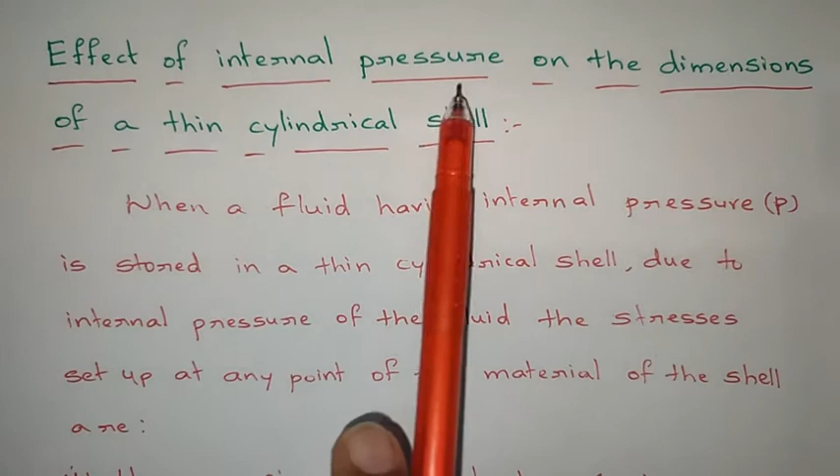Hi everyone. In this video I am going to discuss the effect of internal pressure on the dimensions of a thin cylindrical shell.

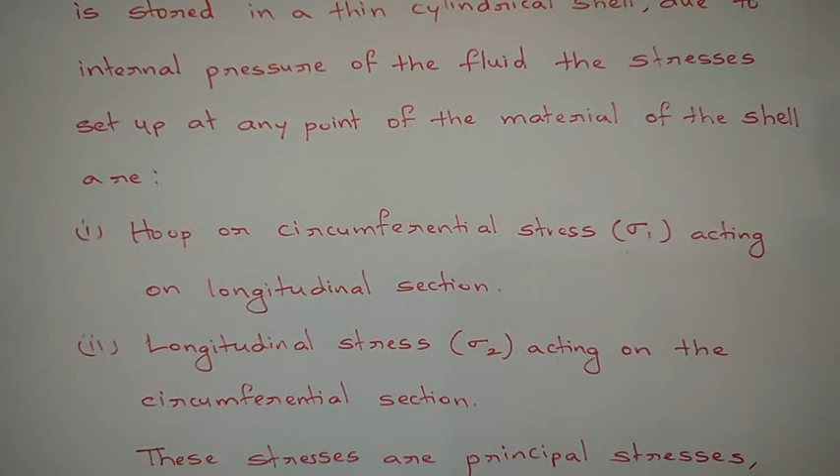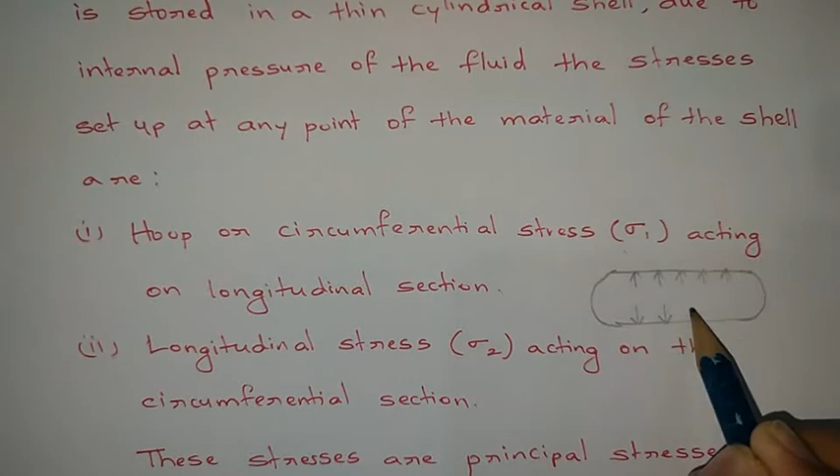If you take the cylindrical shell like this, the hoop stress will act in this direction, or circumferential stress will act in this direction.

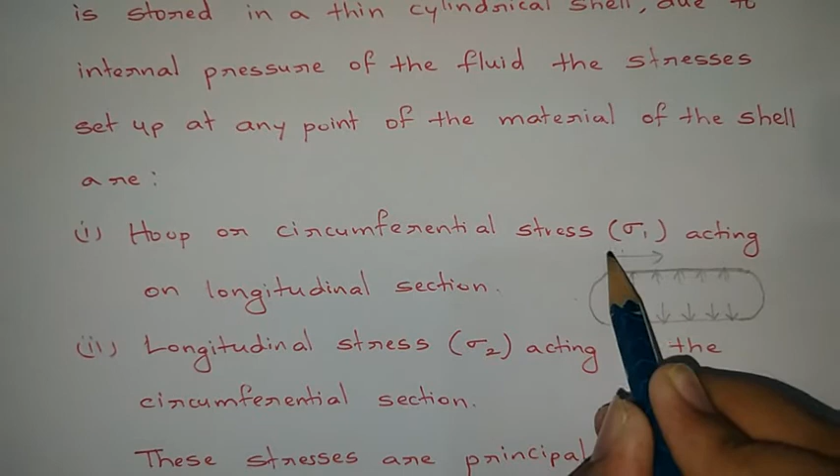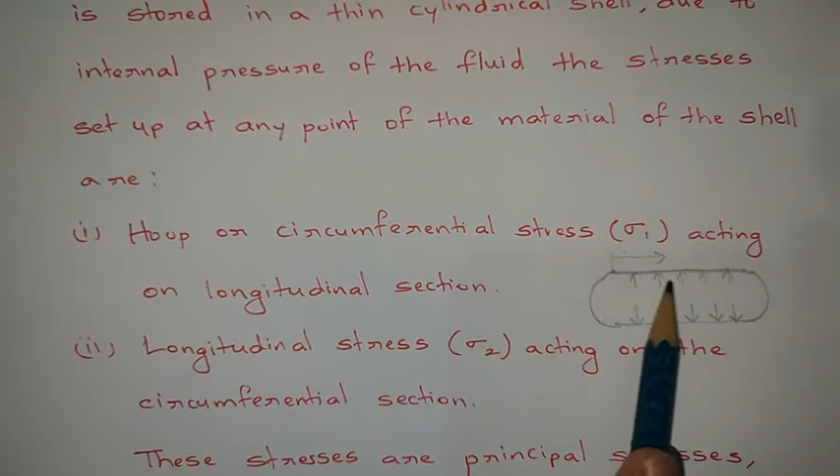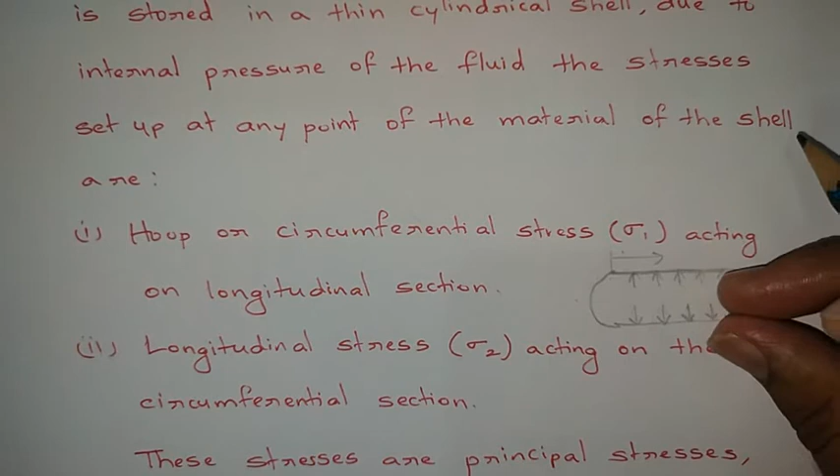This is tensile in nature. If the internal pressure is acting in this way, it will try to elongate the diameter, it will try to increase the diameter. So that nature is tensile.

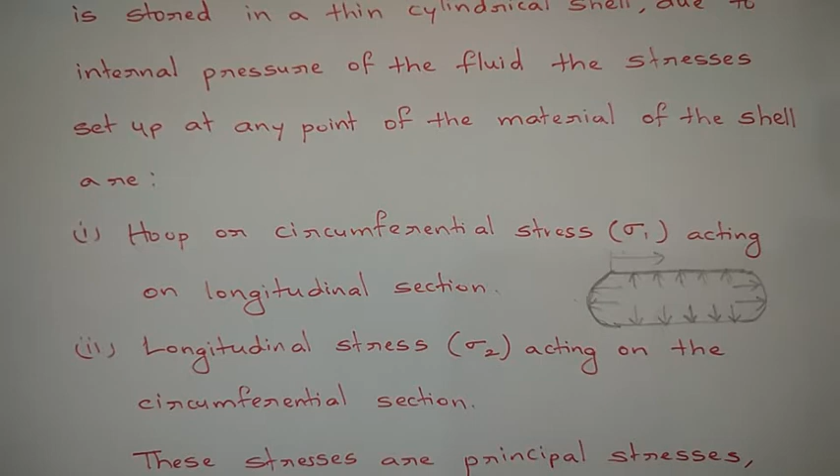Next, longitudinal stress sigma 2 acting on the circumferential section. This is the longitudinal stress, acting on the circumferential section, and it is also tensile in nature.

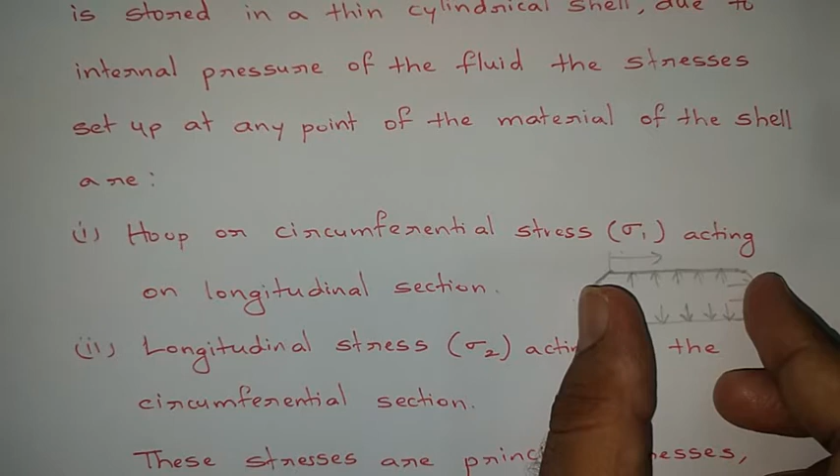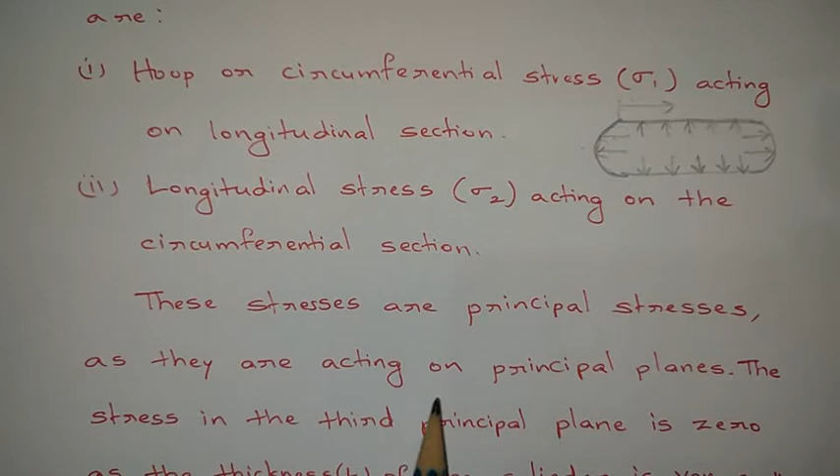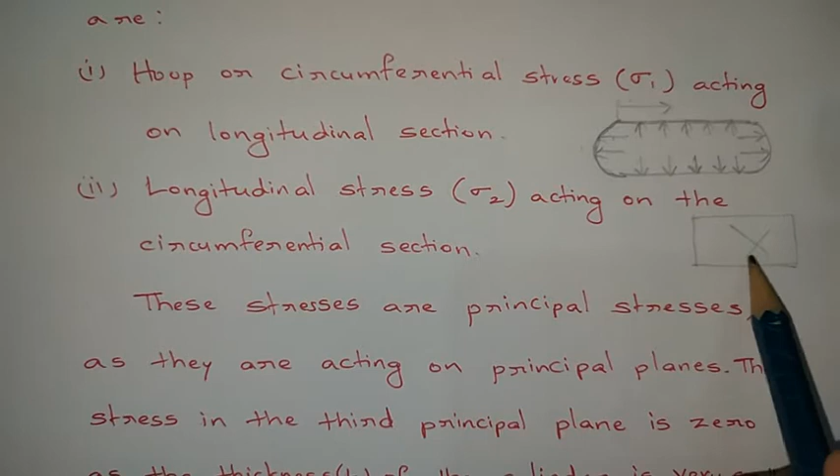These stresses are nothing but principal stresses as they are acting on the principal planes. If you take a plane, the maximum and minimum principal stresses are the stresses acting in the x direction and y direction. So those are known as principal stresses, acting on the principal planes.

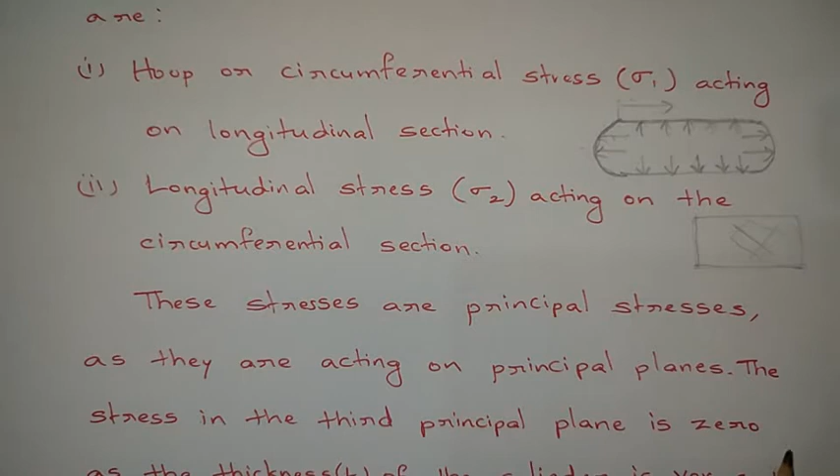The stress in the third principal plane is zero as the thickness of the cylinder is very small. The third dimension is thickness. Since this thickness value is small, considering a coordinate system, we have XY plane, YZ plane, and ZX plane - three planes in total.

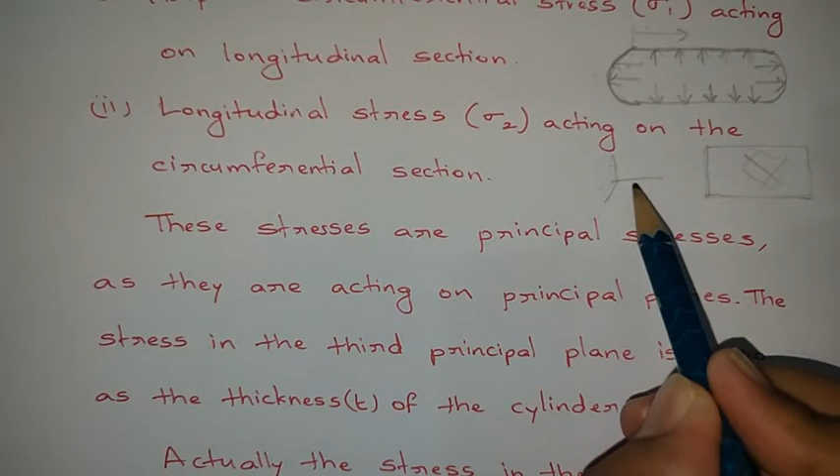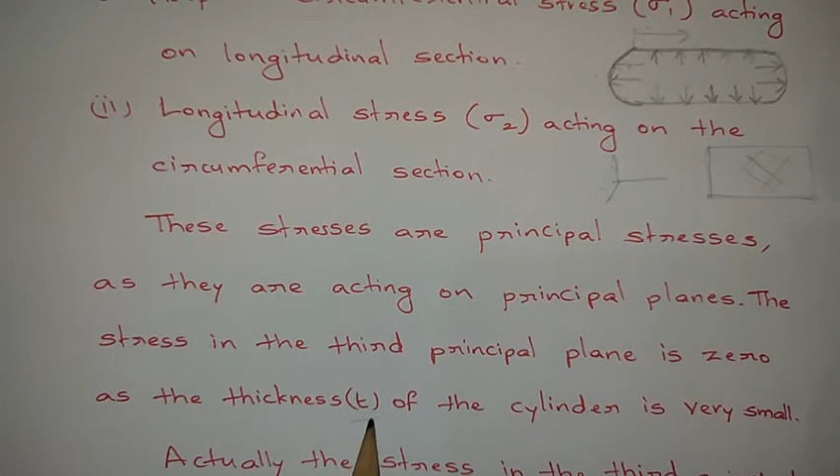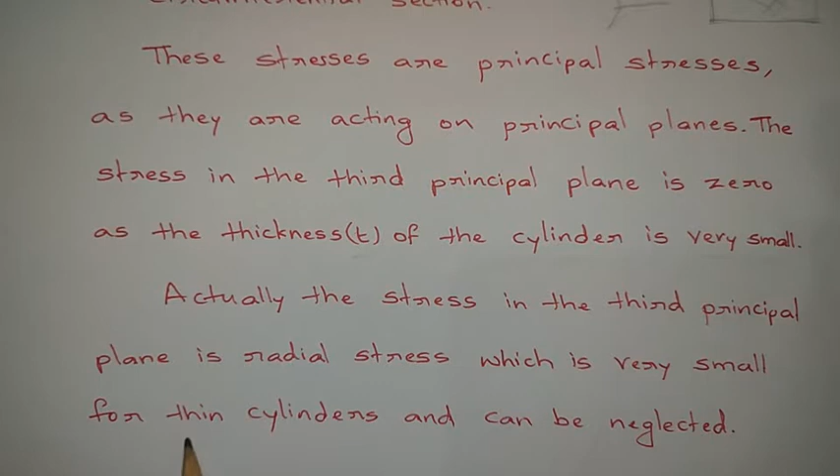Actually the stress in the third principal plane is radial stress, which is very small for thin cylinders and can be neglected, since the thickness value is very small.

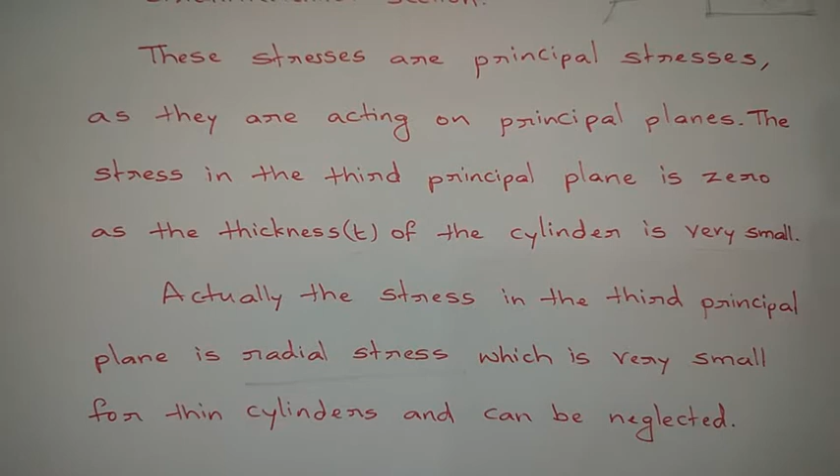Now we are going to calculate the change in dimensions of the cylindrical shell due to the circumferential and longitudinal stress only.

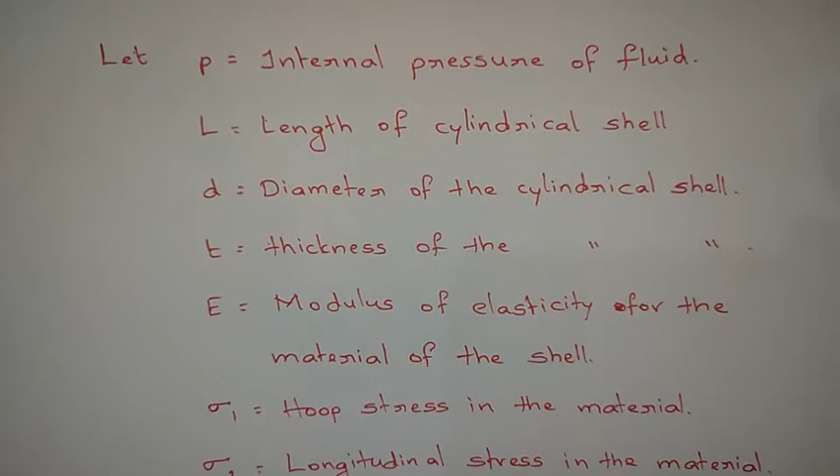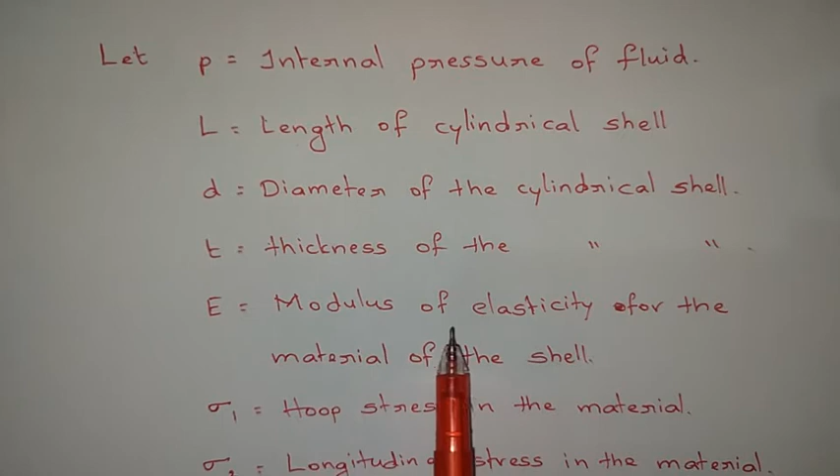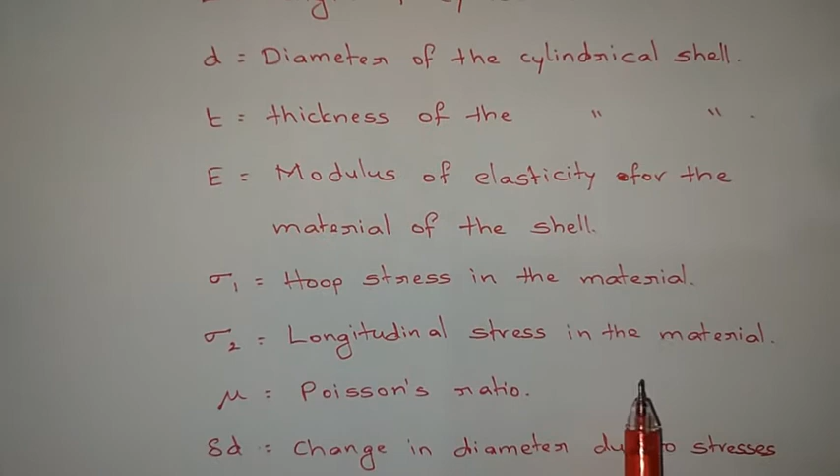Let P equals internal pressure of fluid, capital L equals length of the cylindrical shell, small d is diameter of the cylindrical shell, T is thickness of the cylindrical shell, E equals modulus of elasticity for the material of the shell, sigma 1 is hoop stress in the material, sigma 2 is longitudinal stress in the material, mu equals Poisson's ratio, and delta D is the change in diameter due to the stresses set up in the material.

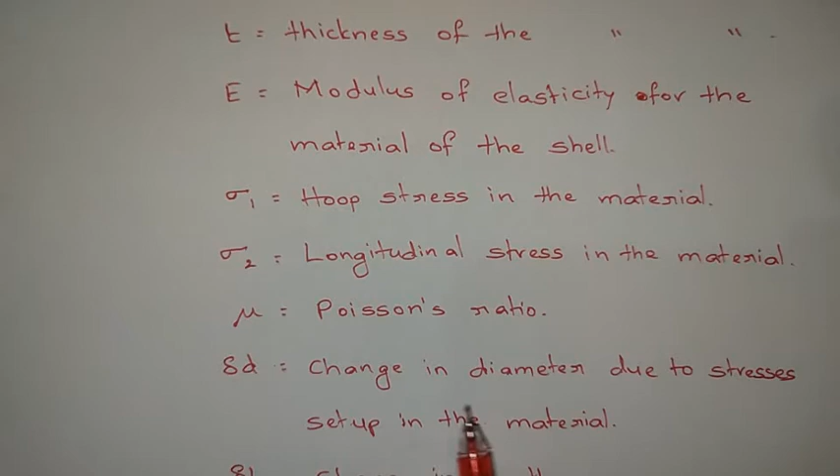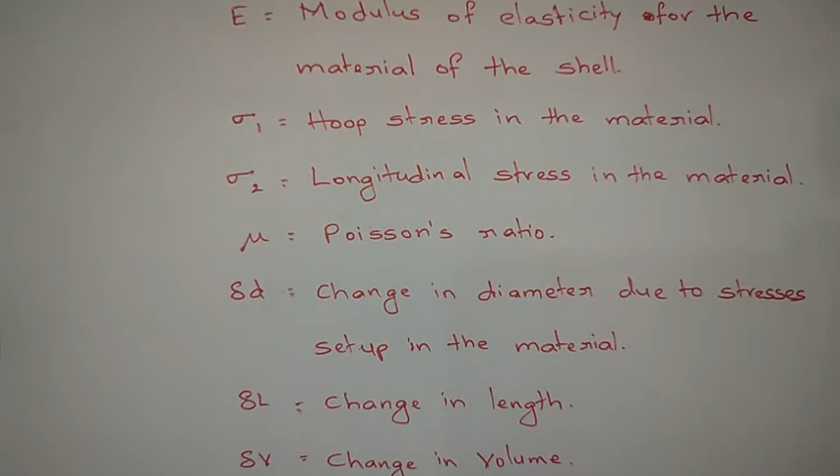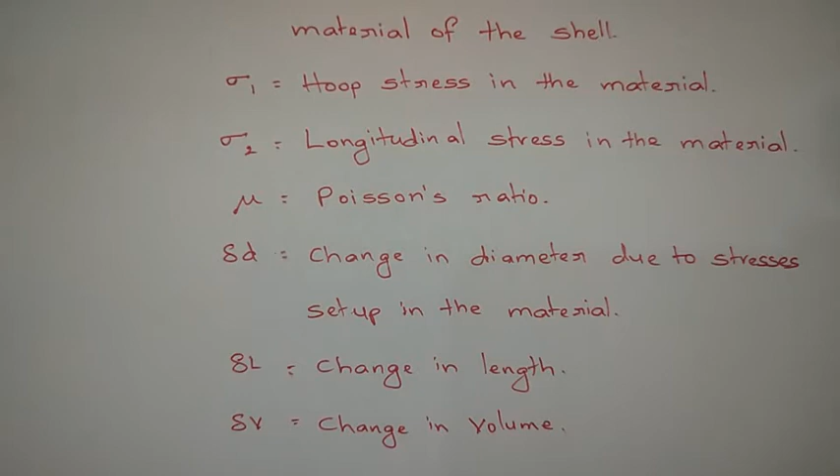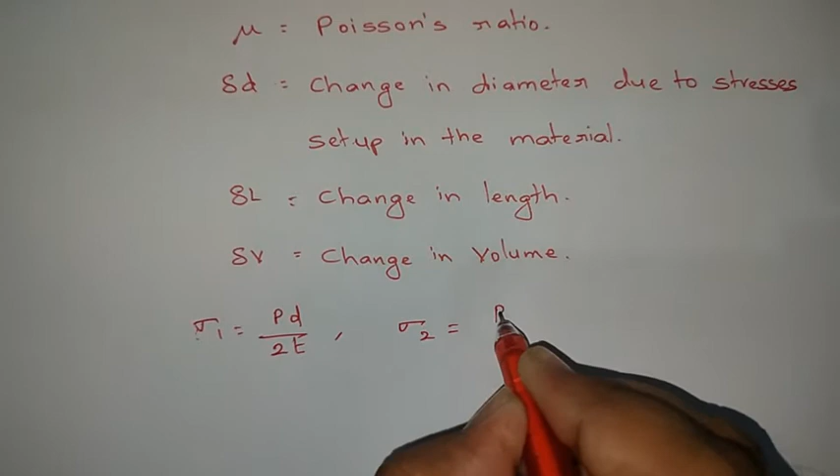Now let us write the values of sigma 1 and sigma 2. What is the formula for sigma 1? Sigma 1 equals PD by 2T. And what is the formula for sigma 2? Sigma 2 equals PD by 4T.

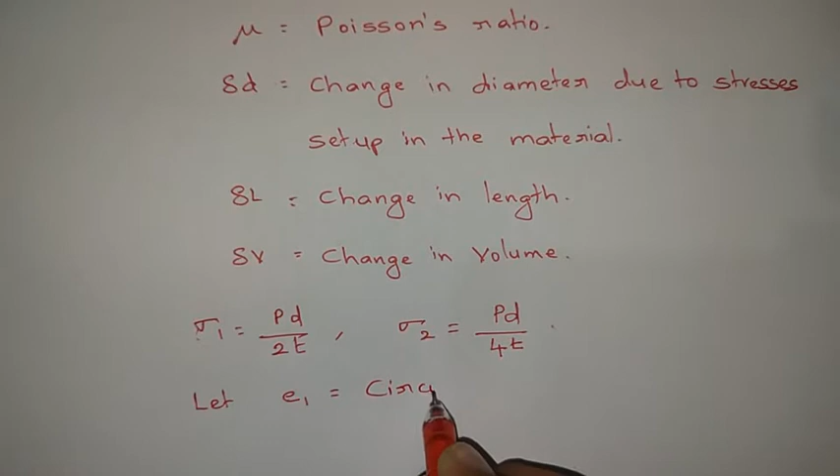And let us say small e1 is the circumferential strain, and small e2 is the longitudinal strain. So now I want to find out these values.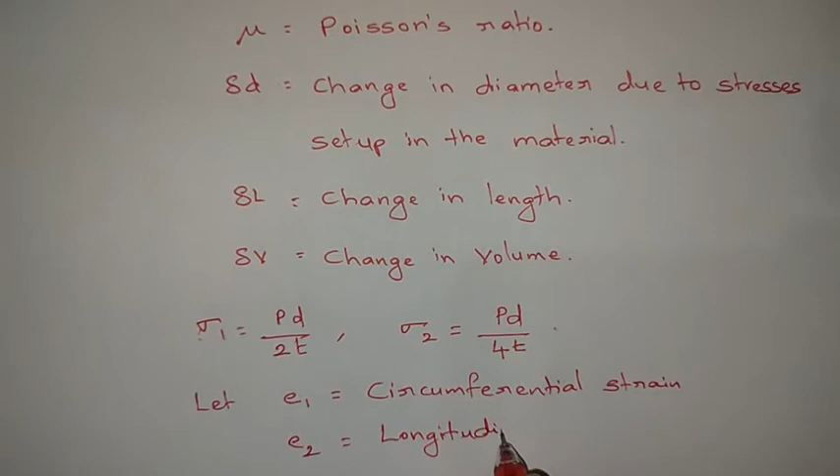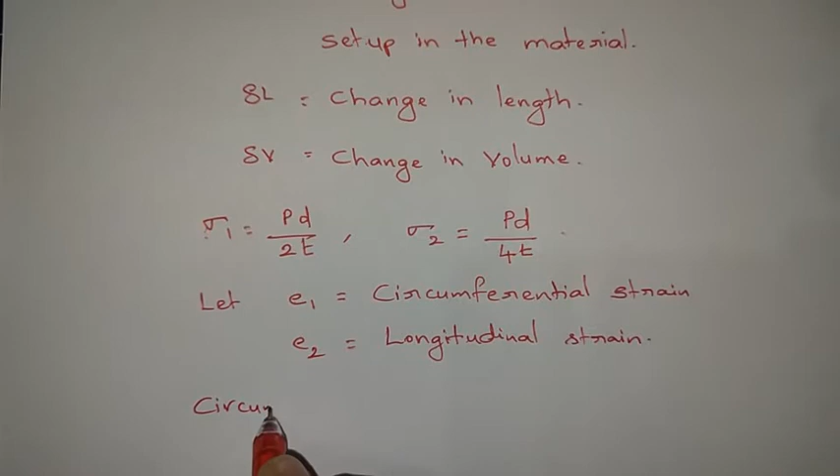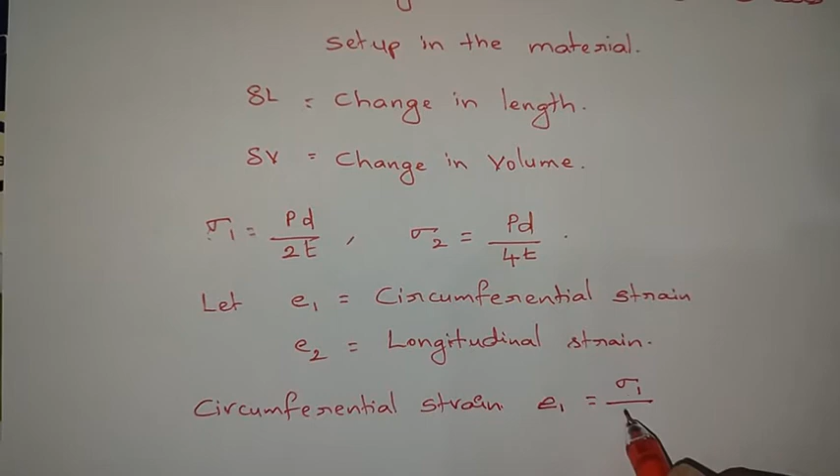Okay, so what is circumferential strain? Circumferential strain E1 is equals to strain, which means stress by Young's modulus in that direction. So this is in the circumferential direction, but there is a stress in the longitudinal direction also, so we have to subtract minus Poisson's ratio mu into sigma 2 by E.

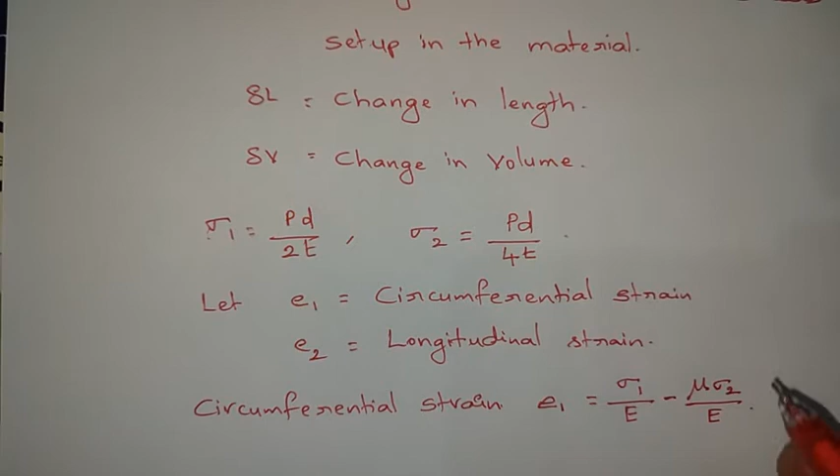So the Poisson's ratio you can take it as mu or nu.

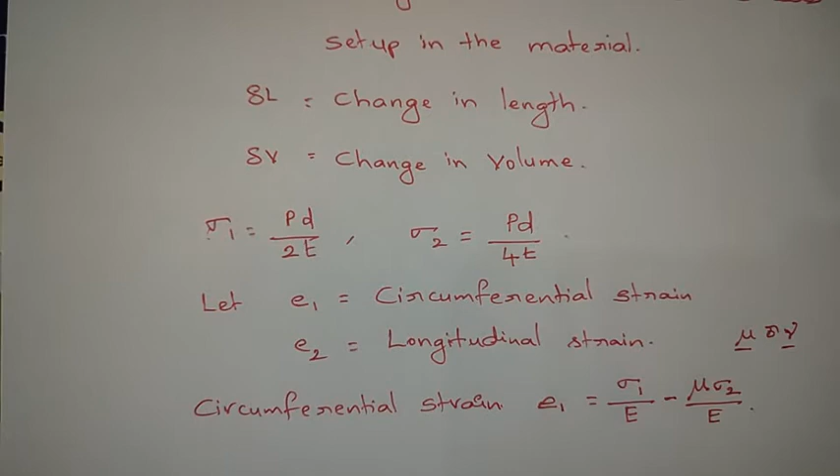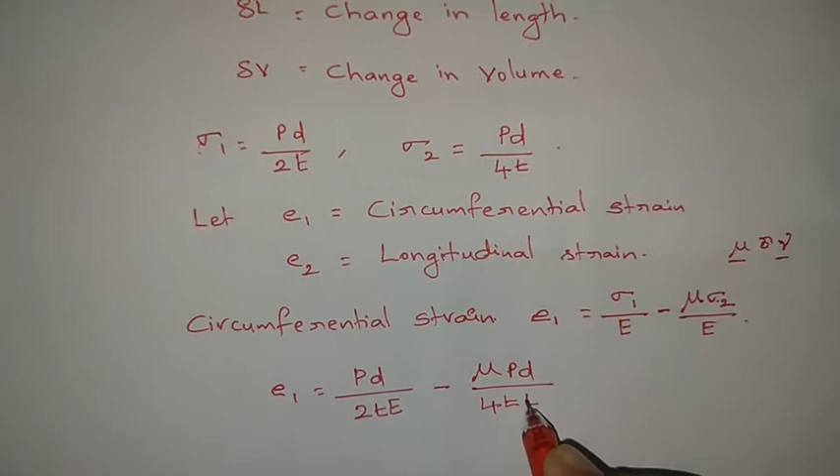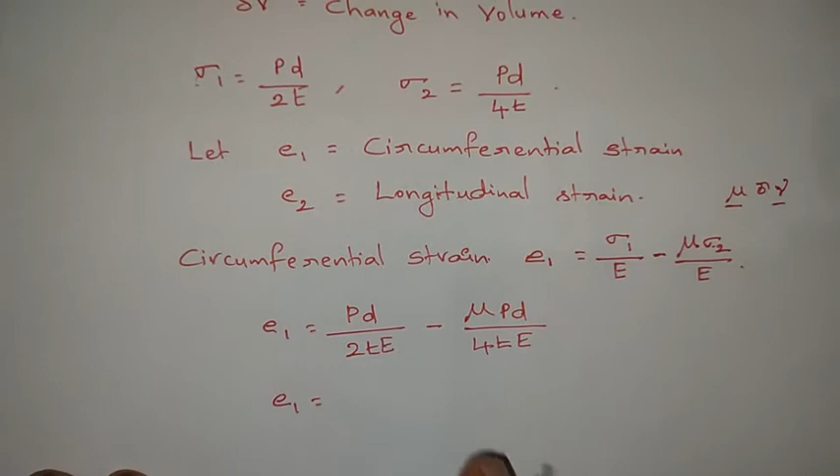Now substitute the values of sigma 1 and sigma 2. So E1 is equals to sigma 1 is PD by 2TE, minus mu into sigma 2 value which is PD by 4TE. So now what is the common term? PD by 2TE is the common term. Then 1 minus mu by 2 is the value of E1.

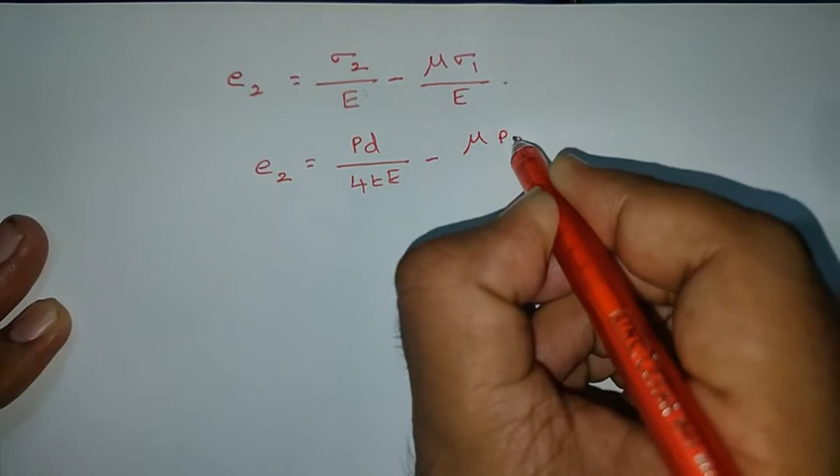Next, let us calculate the value of E2, which is longitudinal strain. So sigma 2 by E minus mu into sigma 1 by E. Now substitute the values of sigma 2 and sigma 1. So E2 is equals to PD by 4TE minus mu into PD by 2TE. So what can we take as common? PD by 2TE. Take this as common, then you get 1 by 2 minus mu. So that is the E2 value.

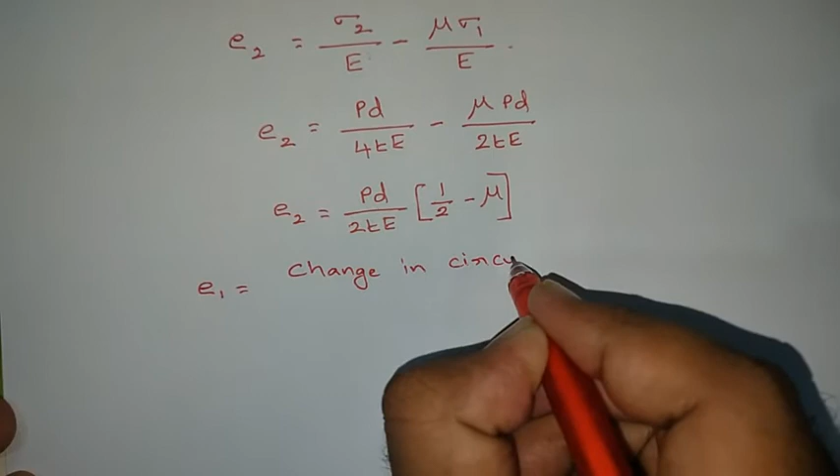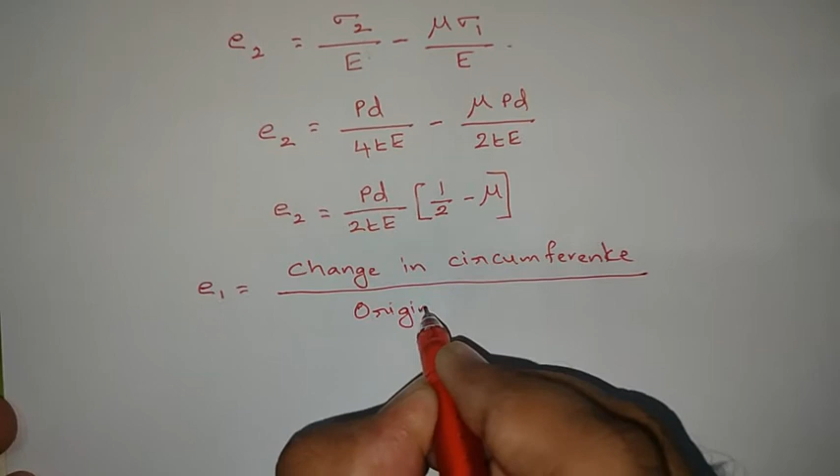So what is E1? E1 equals to circumferential strain. Generally what is the formula for strain? Change in dimension by original dimension. So here I am taking circumferential strain. So what can I write? Change in circumference by original circumference.

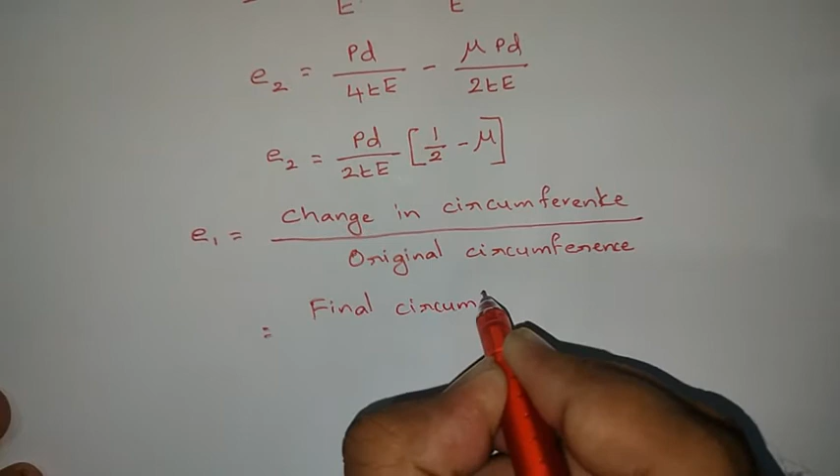So what is change in circumference? Final circumference minus original circumference, by original circumference.

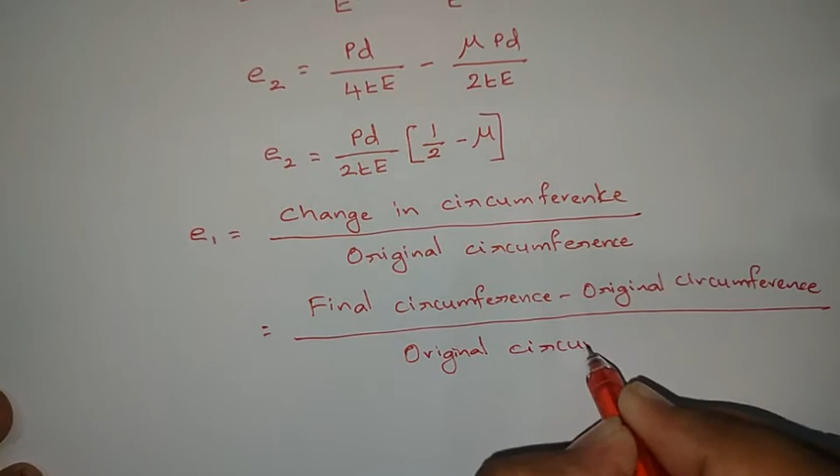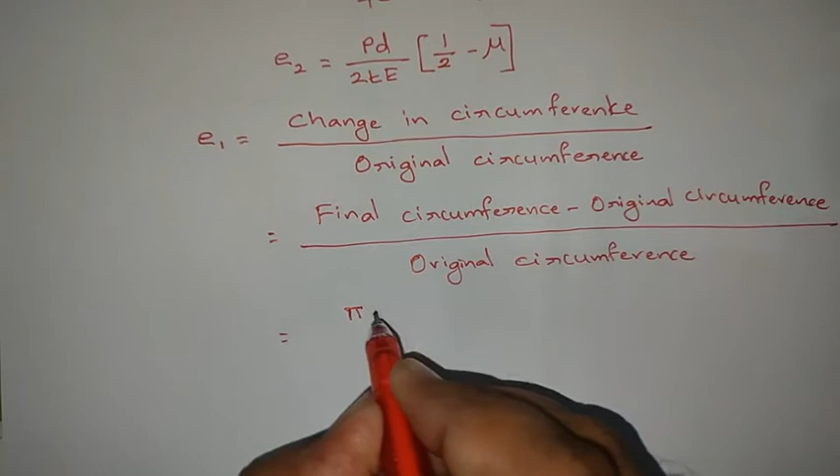So that equals to, what is the final circumference? Circumference formula is pi into d. So what is the change in diameter? Add the change, original is d, so the diameter increases by delta d. So final circumference minus original circumference is pi into d plus pi into delta d, minus pi d, all by pi d. So pi d will be cancelled, and pi will be cancelled. So what is the remaining? E1 equals to delta d by small d.

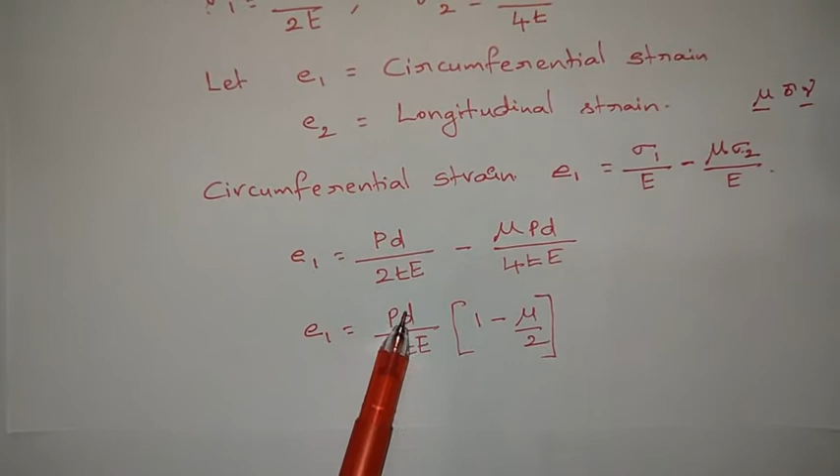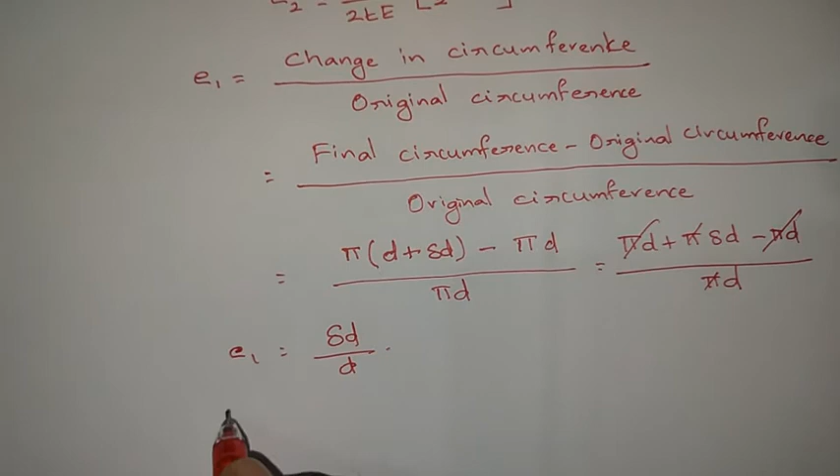But what already we got as E1? We got E1 as PD by 2TE into 1 minus mu by 2. So take this as one E1, and the other E1 is delta d by d. So equate these two. Then delta d by d is equals to PD by 2TE into 1 minus mu by 2.

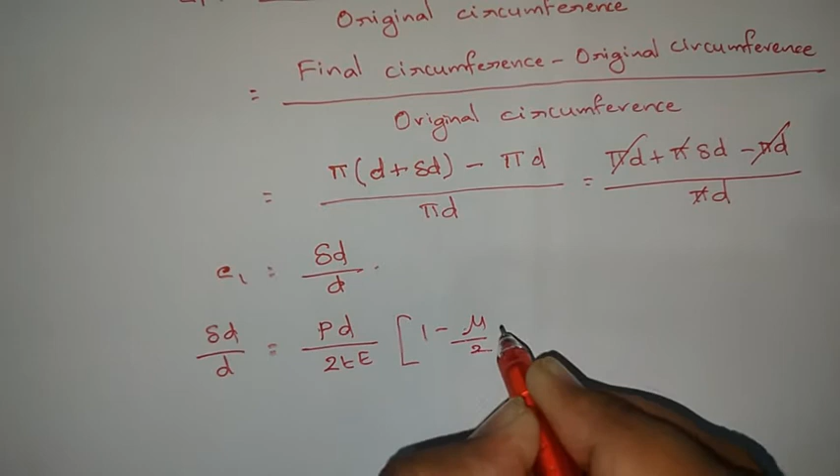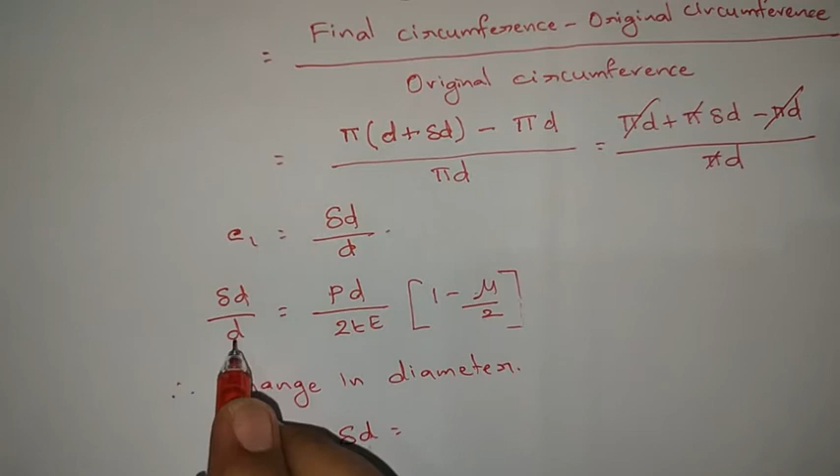So what is the change in diameter? Therefore, change in diameter delta d is equals to, so this d will come to the numerator, then PD square by 2TE into 1 minus mu by 2. So this is the change in diameter due to the internal pressure P.

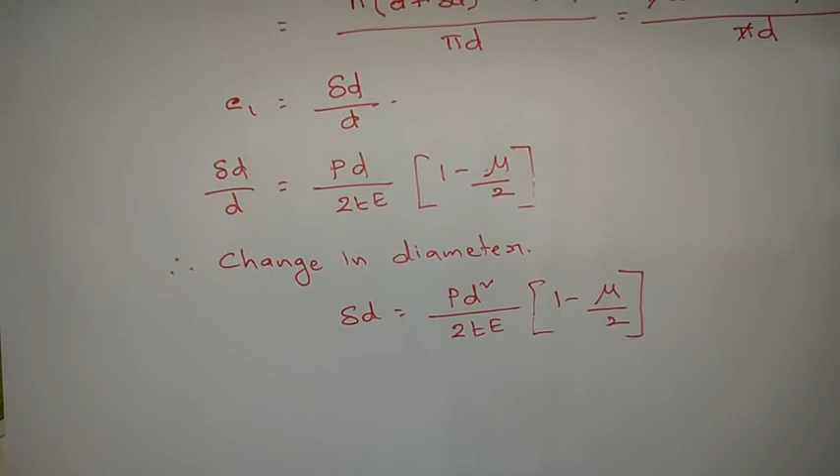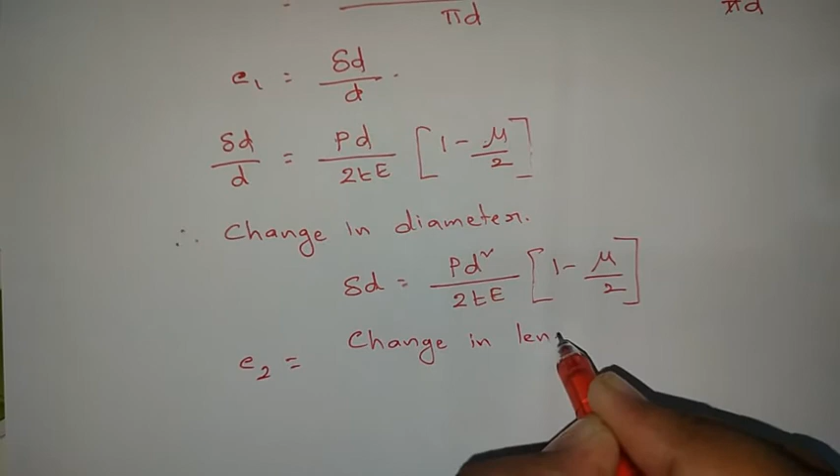Next, let us calculate the change in length. So what do we know? E2 is equals to longitudinal strain. Longitudinal means length direction. So E2 is equals to change in length by original length. So what is change in length? That is delta L, the change in length, by original length L. But already we got E2 as PD by 2TE into 1 by 2 minus mu.

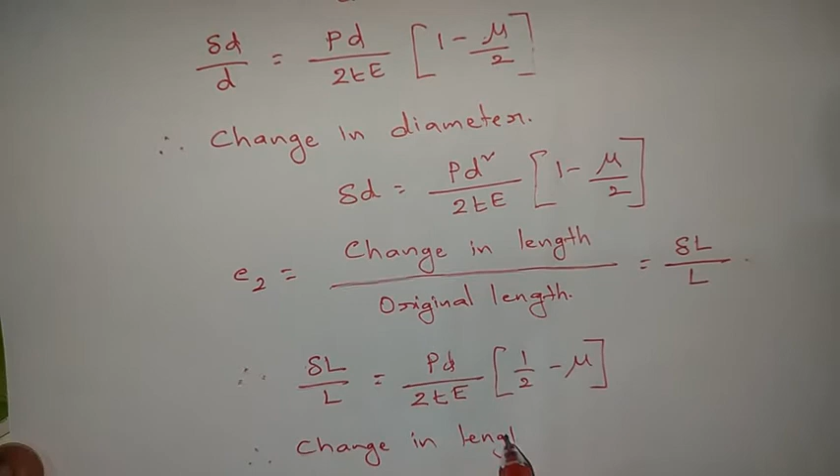So equate this one to delta L by L. Therefore delta L by L is equals to PD by 2TE into 1 by 2 minus mu. Therefore change in length delta L is equals to, so this L will come to the numerator, so that is PDL by 2TE into 1 by 2 minus mu. So this is the change in length.

So we calculated change in diameter and we calculated change in length also. Now let us calculate the change in volume. For calculating the change in volume, I am taking volumetric strain. So what is volumetric strain? Volumetric strain is equals to change in volume by original volume, that is delta V by original volume V. Now let us calculate both terms. First calculate change in volume. Change in volume is equals to final volume minus original volume.

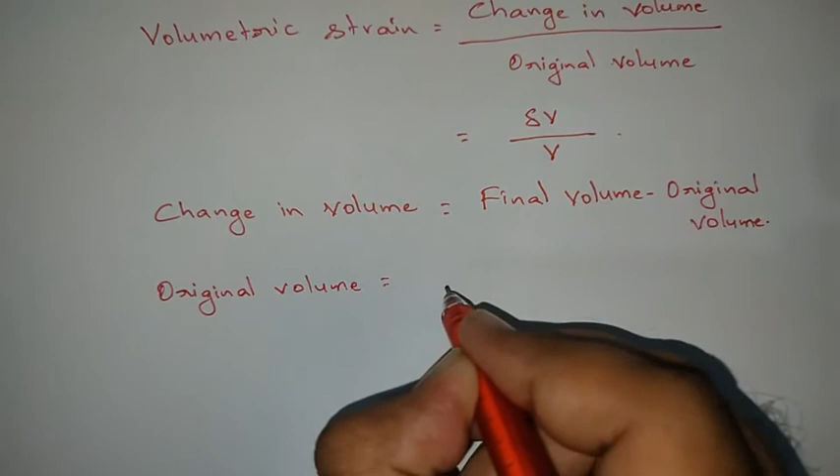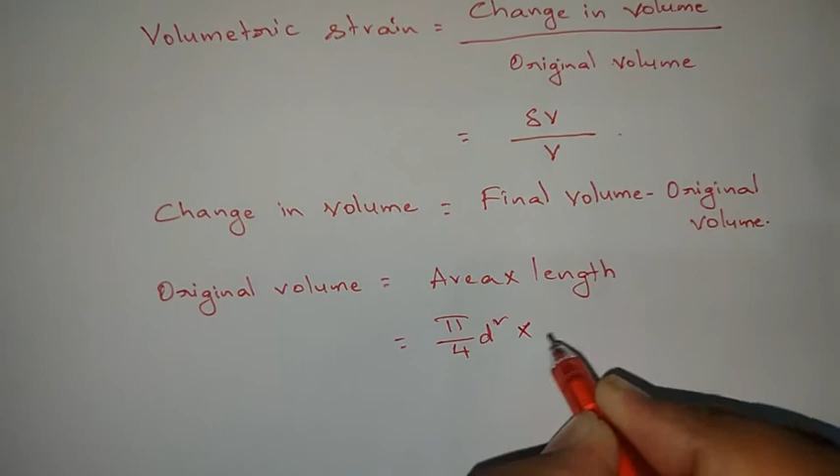So first let us calculate the original volume. Original volume is equals to area into length of the cylindrical shell. So area of the cylindrical shell is pi by 4 d square into length is L. This is the original volume.

Then what is the final volume? Final volume is equals to final area into final length.

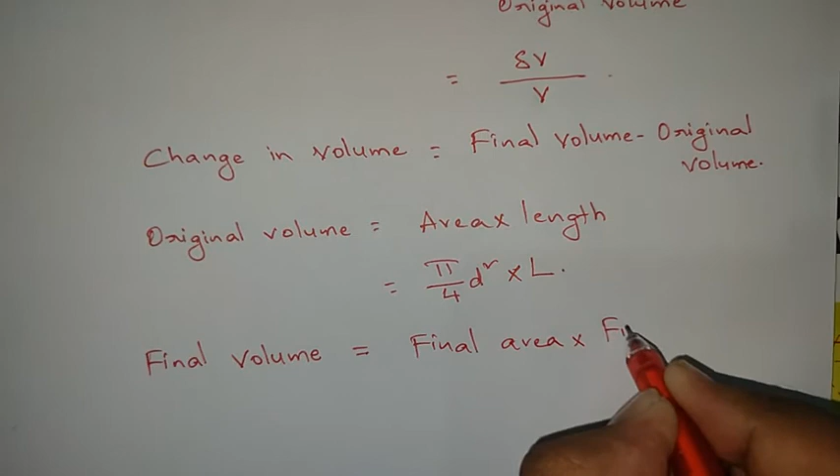So what is the final area? Pi by 4 into the diameter, final diameter is d plus delta d. Initial d, due to internal pressure, delta d is increased, whole square into what about length? Initial length is L, but because of the internal pressure, length is increased by delta L. So now this is the final length.

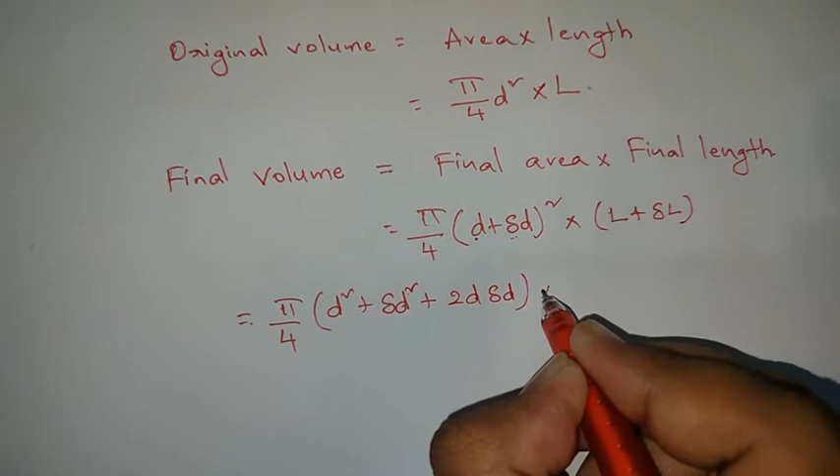So now do the calculation. Pi by 4 into a plus b whole square. So d square plus delta d square plus 2d into delta d into L plus delta L. Now multiply these two terms also.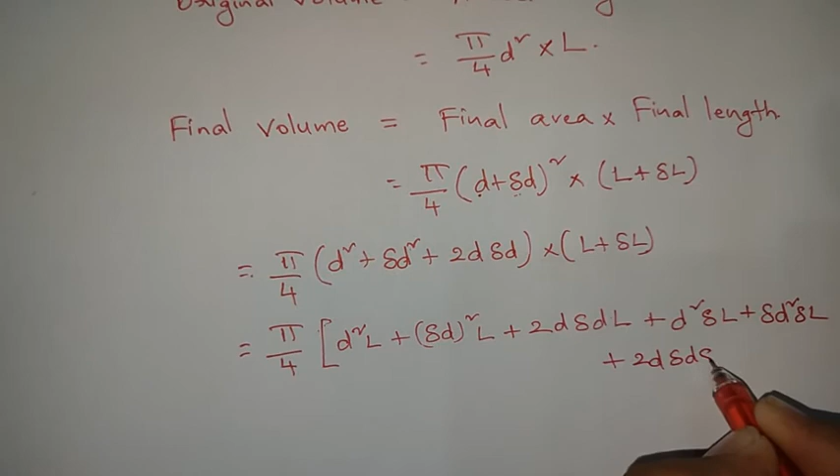So what we get? Pi by 4 into, multiply d square into L plus delta d square into L plus 2d delta d into L plus d square into delta L plus delta d square into delta L plus 2d delta d delta L. So those 6 terms are there.

So now in all of these 6 terms, the smallest values are delta d square into L, and next delta L into delta d square, and next 2d delta d delta L. So these 3 values are small when compared to these 3 values.

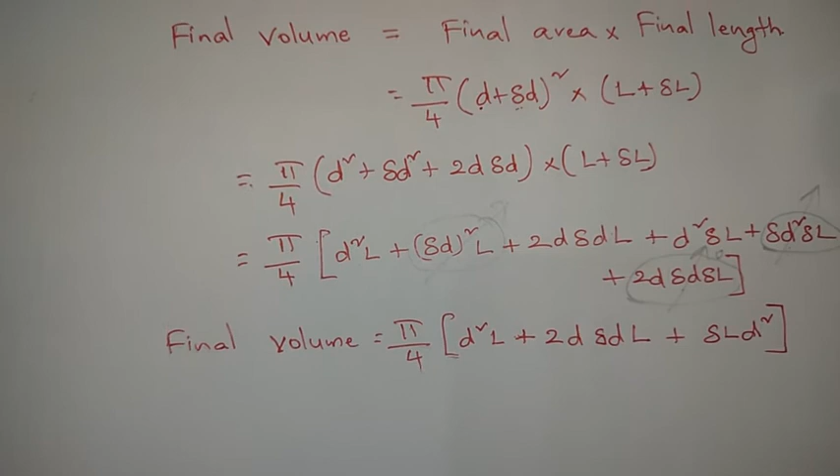So now calculate the change in volume. Change in volume is equals to, that is delta V is equals to final volume minus original volume. So what is final volume? Pi by 4 into d square into L plus 2 dl delta d plus d square into delta L minus original volume is pi by 4 into d square into L.

So if you observe, if you expand here, pi by 4 d square L, next pi by 4 d square L. So these two terms will get cancelled. So then what is the remaining thing you will get? That equals to pi by 4 of 2 dl delta d plus d square delta L is the change in volume.

Now calculate the volumetric strain. Therefore volumetric strain is equals to change in volume by original volume.

So what is change in volume? This one. So pi by 4 into 2dl delta d plus d square into delta L by what is original volume? Pi by 4 into d square into L.

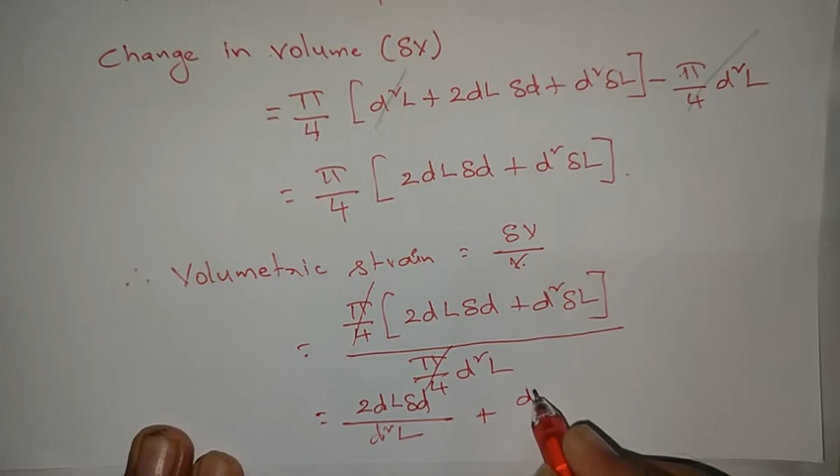So pi by 4 will be cancelled. So then what you get? 2dl delta d by d square L plus, I am expanding same time, d square delta L by d square into L. So here L will cancel, one d will be cancelled, and here d square cancelled. So what you get? 2 delta d by d plus delta L by L.

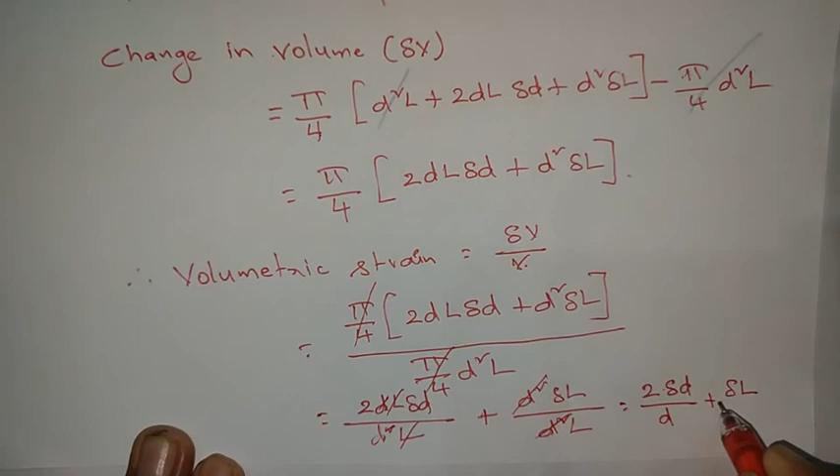Therefore volumetric strain is equals to 2 delta d by d plus delta L by L. So that equals to delta d by d means circumferential strain plus delta L by L means longitudinal strain. Circumferential strain, longitudinal strain. So now substitute the values of E1 and E2.

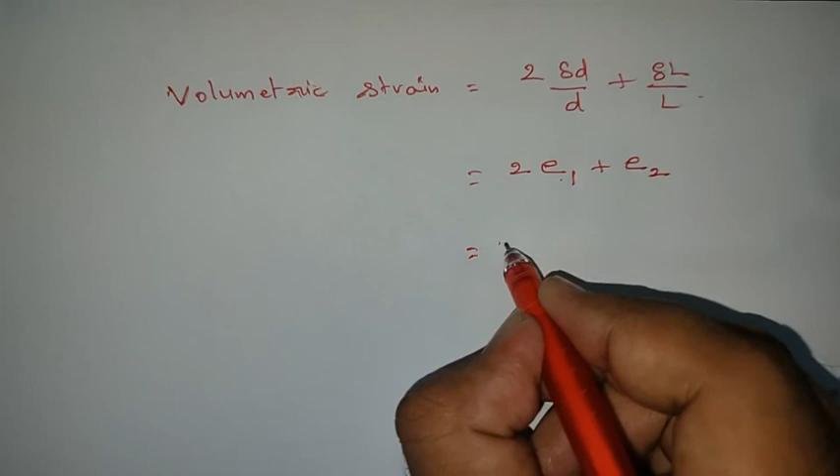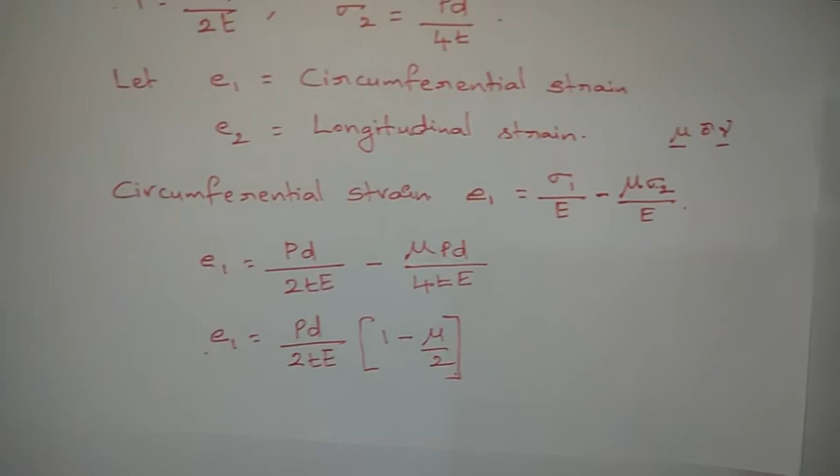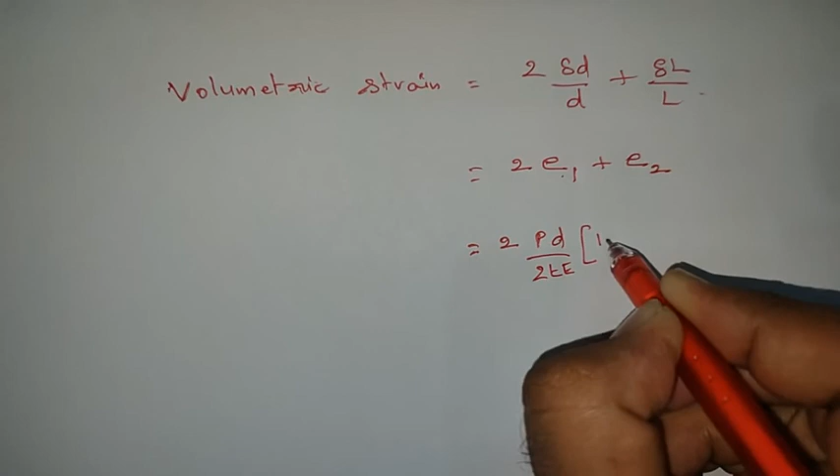So that equals to 2 into E1 value, so already we got the E1 value. That value is equals to PD by 2TE into 1 minus mu by 2 plus what is E2 value? So E2 value is equals to PD by 2TE into 1 by 2 minus mu.

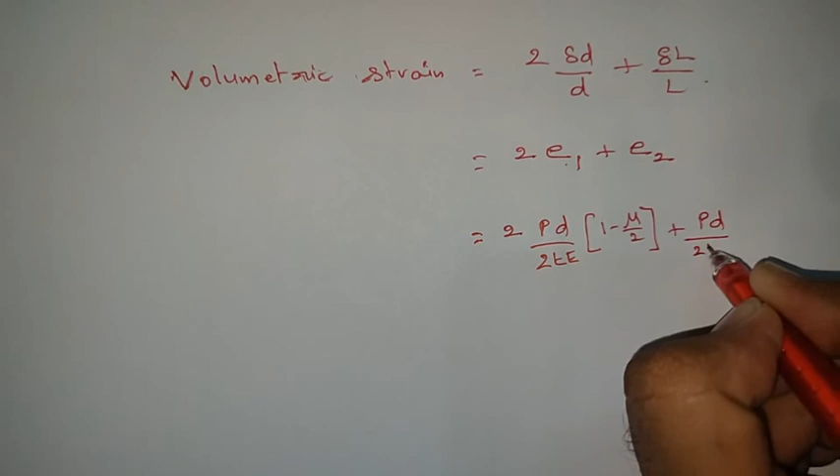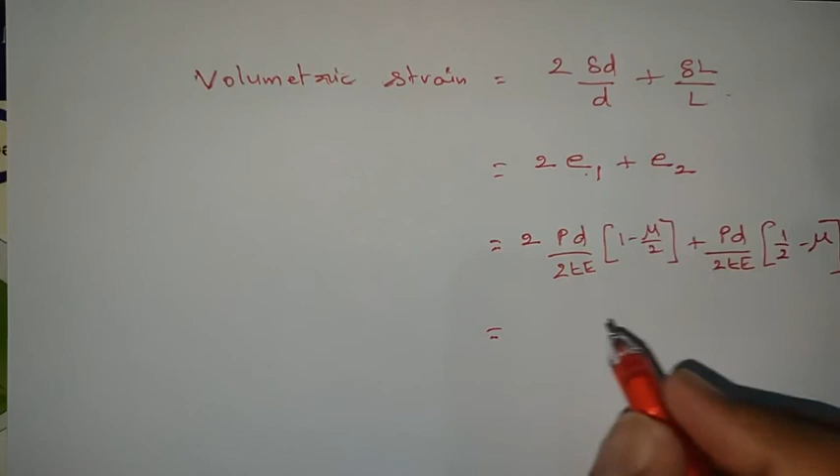So that is E2. Substitute. PD by 2TE into 1 by 2 minus mu. So now in both the terms, what is the common thing? PD by 2TE is the common.

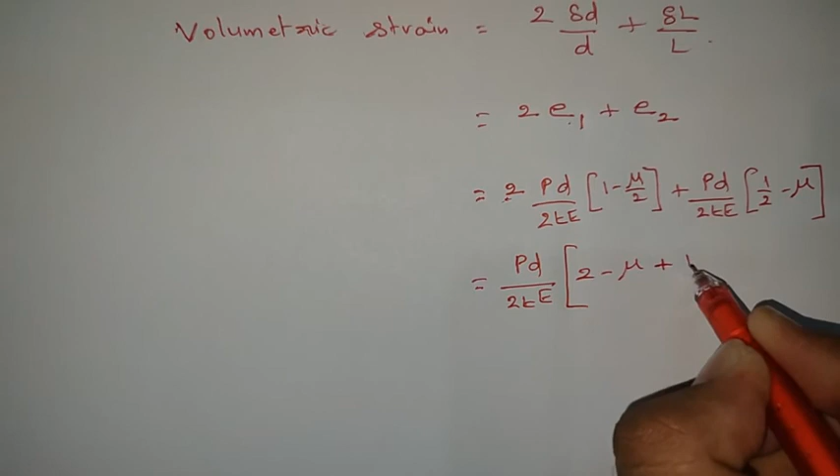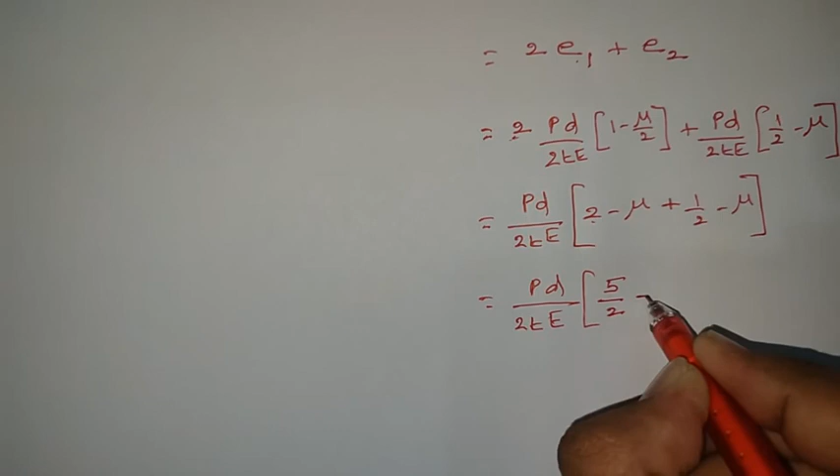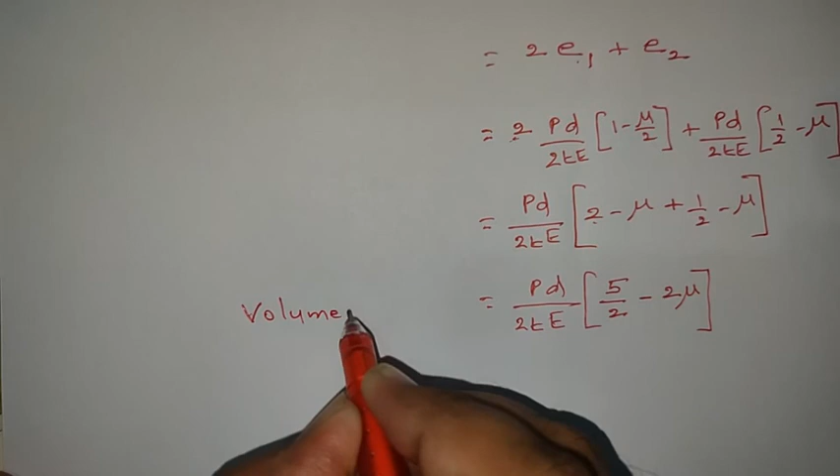So what you get? 2 into 1, 2 minus 2 into mu by 2 is mu plus 1 by 2 minus mu. So that equals to PD by 2TE into what is 2 plus 1 by 2? 5 by 2 minus mu minus mu, that means minus 2 mu. So this is the value of volumetric strain. So like this, there is an effect on the dimensions of the thin cylinder due to the internal pressure.

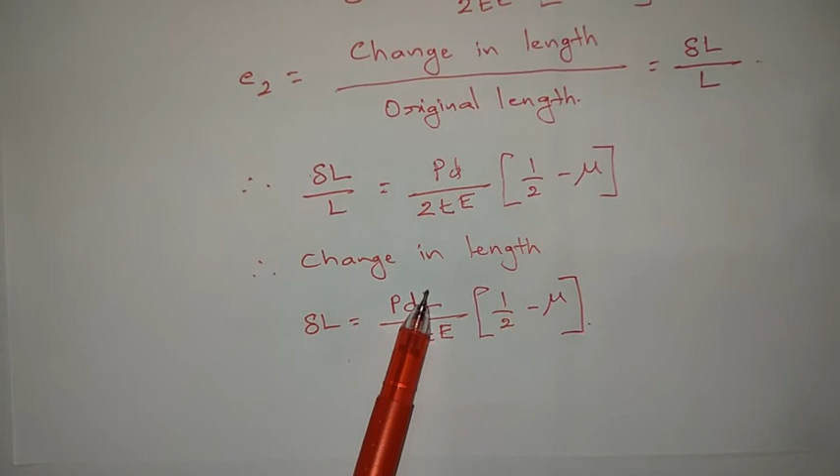So we calculated the change in diameter, and also we calculated change in length, and finally we calculated the change in volume also, and also we have derived the relation in between volumetric strain, circumferential strain